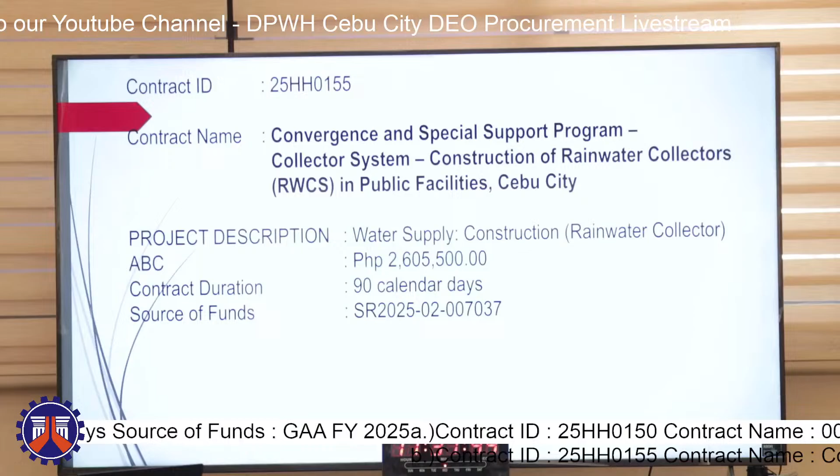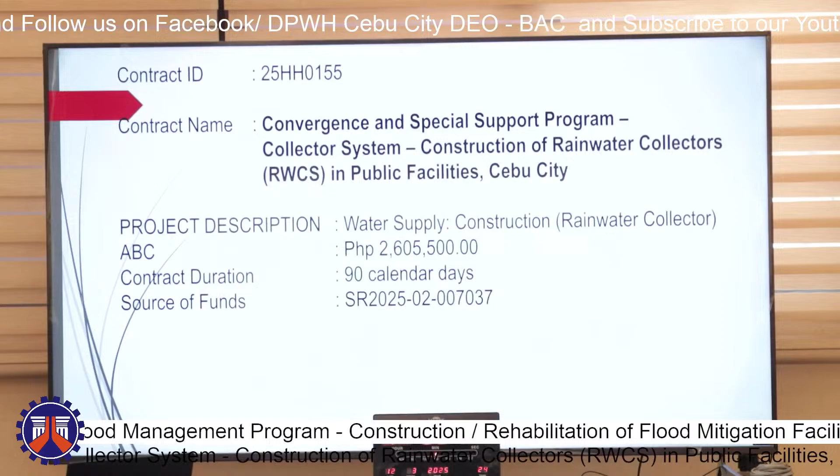Good morning, everyone. This is for contract ID 25HH0155, Convergence and Special Support Program, collector system, construction of rainwater collectors in public facilities in Cebu City. Project description is water supply construction and rainwater collector. Approved budget cost is 2,605,500, and contract duration is 90 calendar days. Source of fund SR 2025-02-007037.

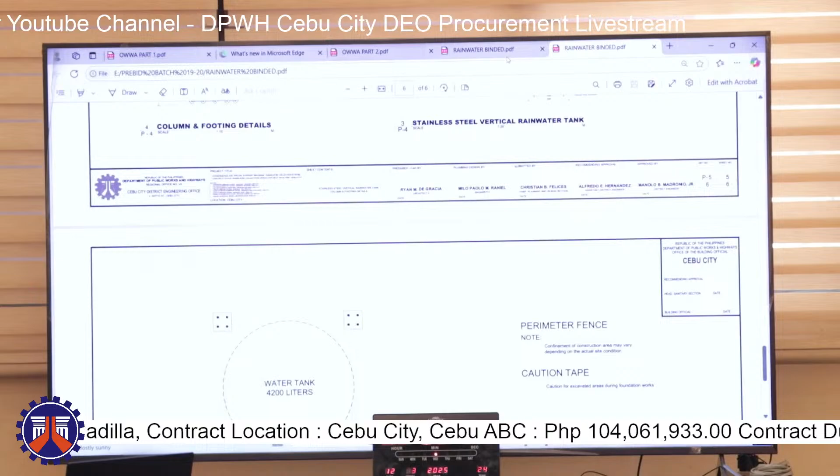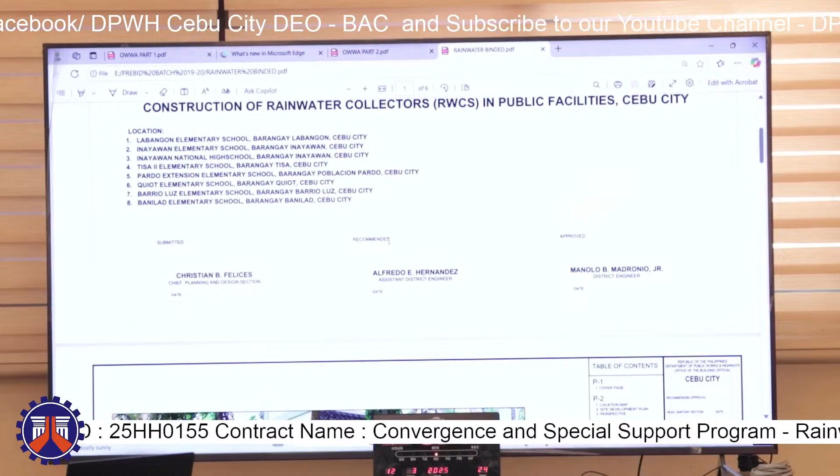This is the location of these various respective projects. We have 8 locations for this project. These are the typical plans: Labangon Elementary School, Inayawan Elementary School, Inayawan National High School, TISA 2 Elementary School, Pardo Extension Elementary School, Quiot Elementary School, Barrio Luz Elementary School, and Banilad Elementary School.

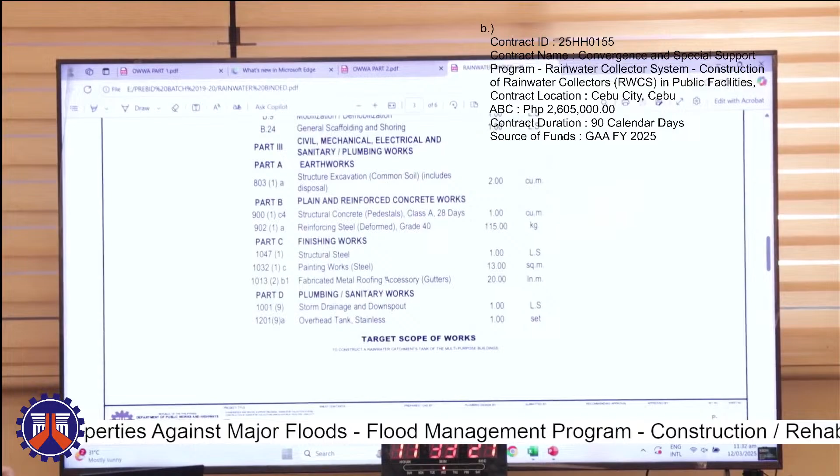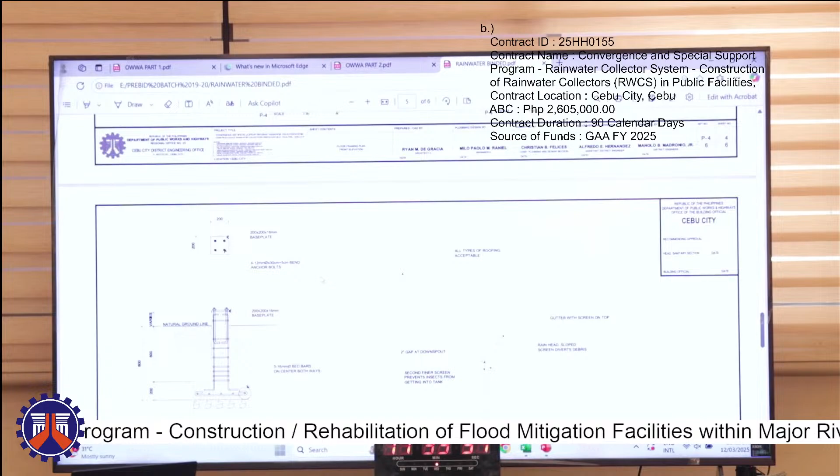These are the summary of quantities of the construction, earthworks, and also the finishes and plumbing. These are the typical plans of the respective projects, showing the details and connections from gutter to our tanks. That's all, thank you.

8 sites, 8 locations.

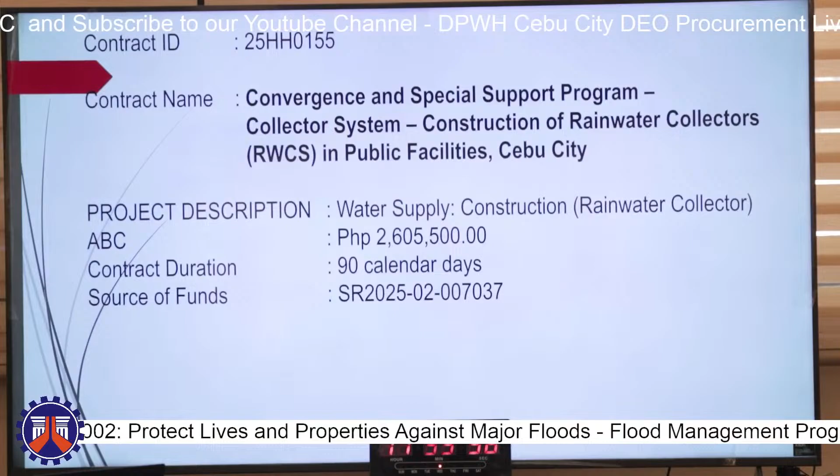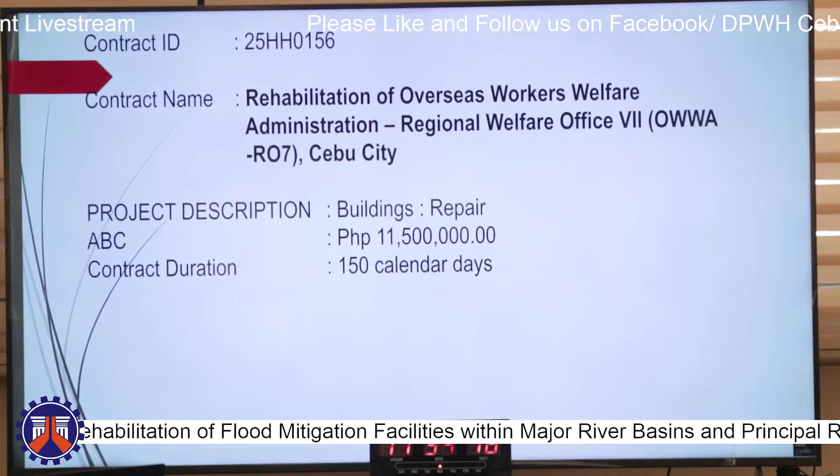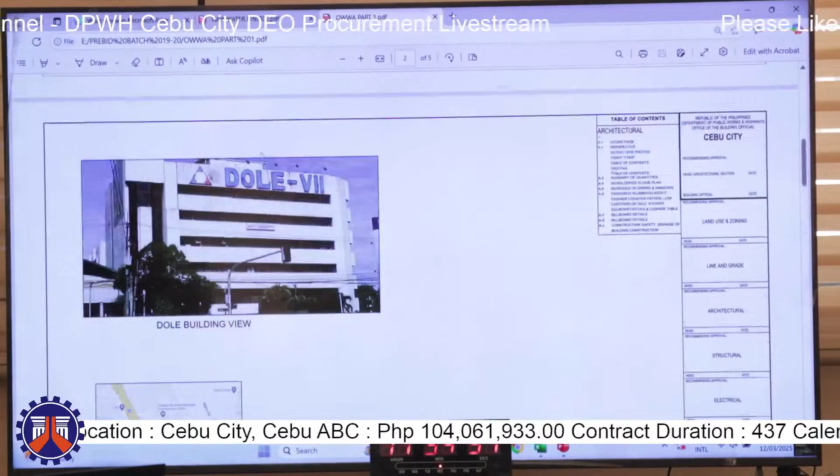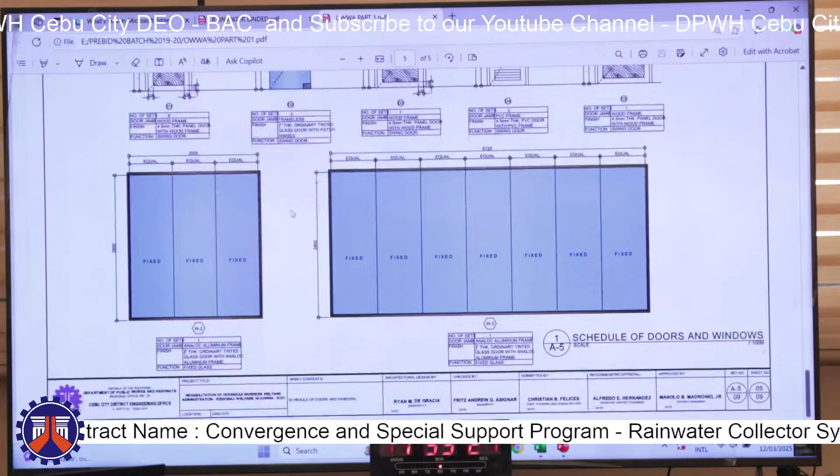Next ID number is 25HH0156, Rehabilitation of Overseas Workers Welfare Administration, Regional Welfare Office 7, OWWA RO7, Cebu City. Project description, buildings repair. Approved budget cost, 11,500,000. Contract duration, 150 calendar days. Located at DOLE 7 building, second floor, OWWA. Scope of work is mainly electrical, repair of walls, windows, then plumbing fixtures, partition, glass partition, doors, replacement of doors, but this project is really more on electrical works.

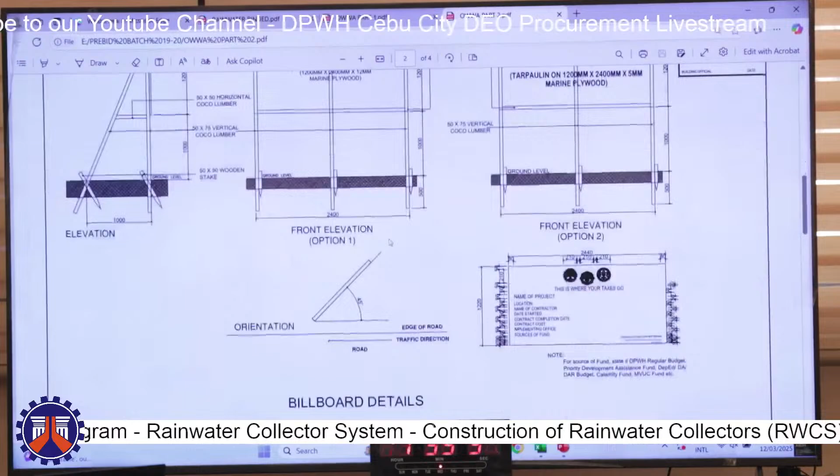That's all. 11,500,000, ma'am. Only the second floor, ma'am, OWWA office only.

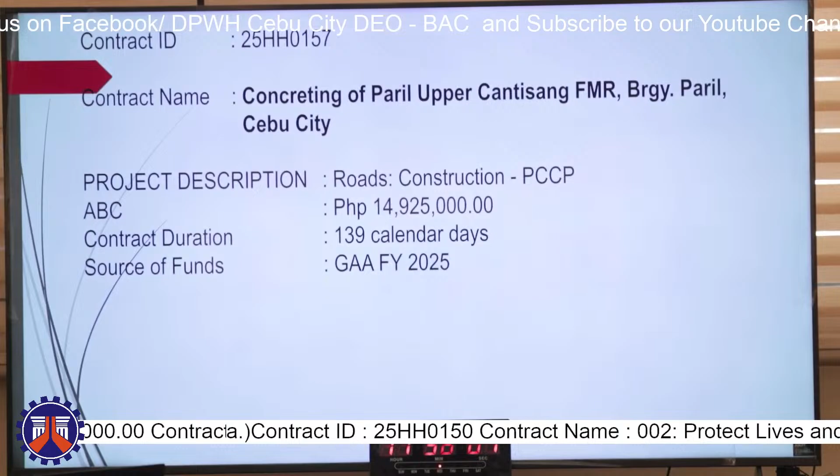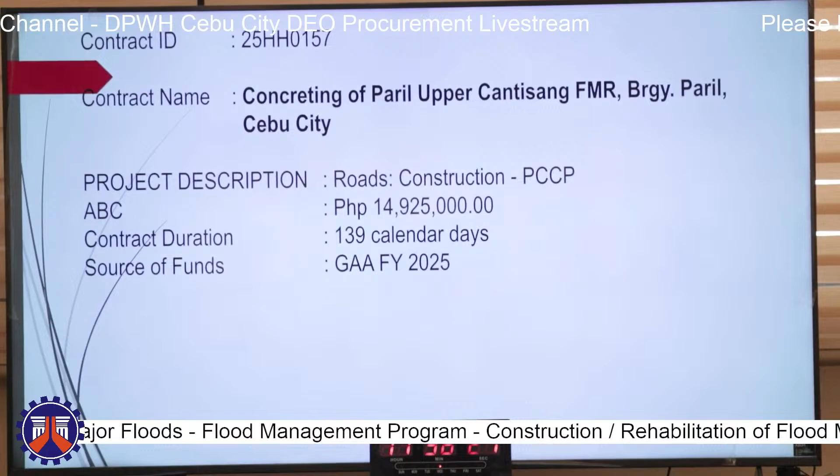Good morning, everyone. For the next contract ID 25HH0157, concreting of Paril Upper Cantisang FMR, Barangay Paril, Cebu City, with project description roads construction PCCP, with an ABC amount of 14,925,000 and a contract duration of 139 calendar days.

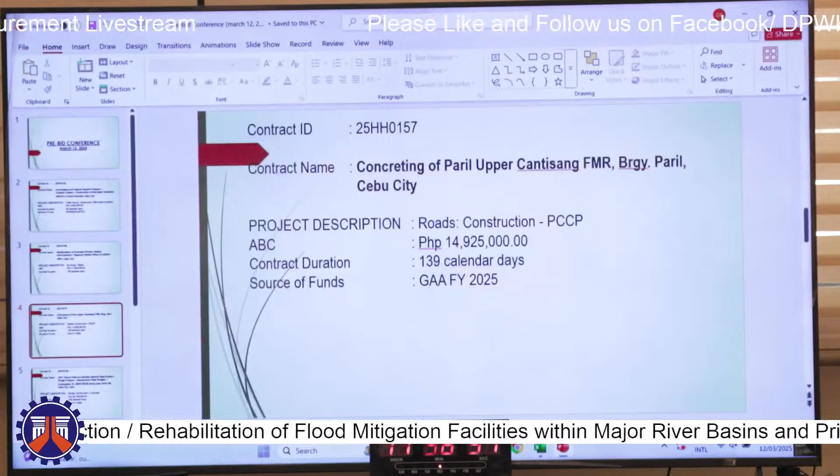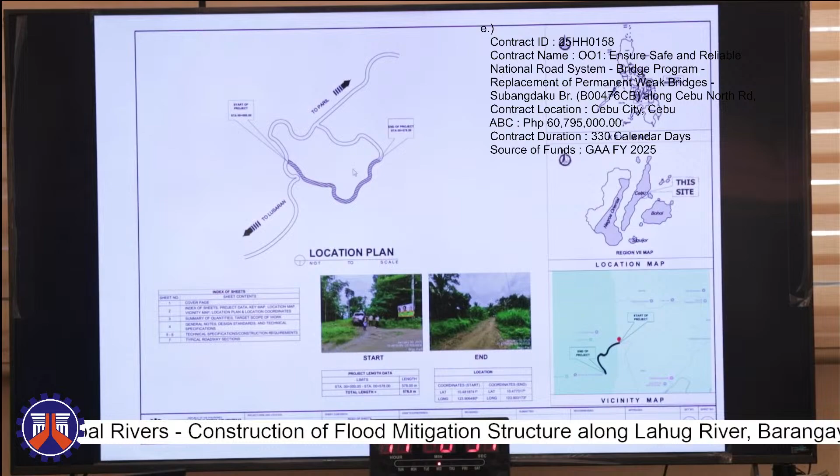The project has a net length of 578 meters. This is the location plan of the project, and at the bottom right shows the start and end of the project with corresponding coordinates to easily locate it.

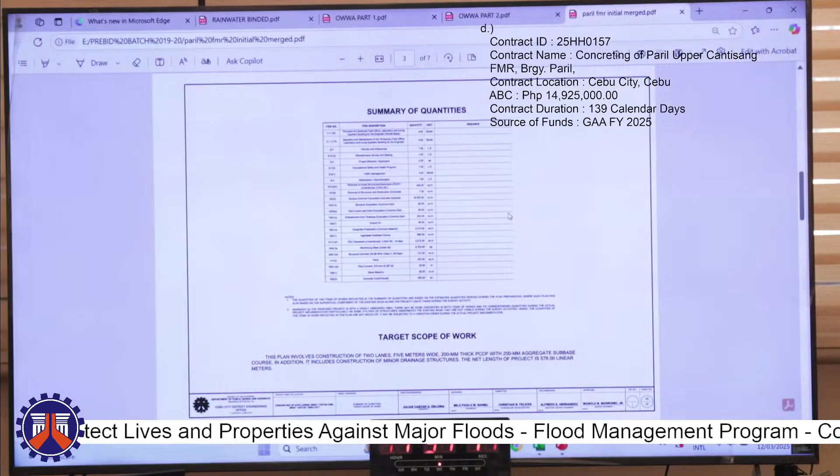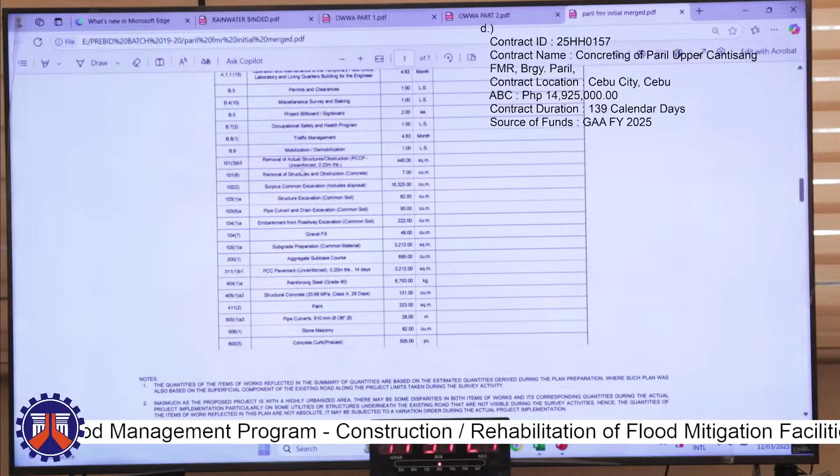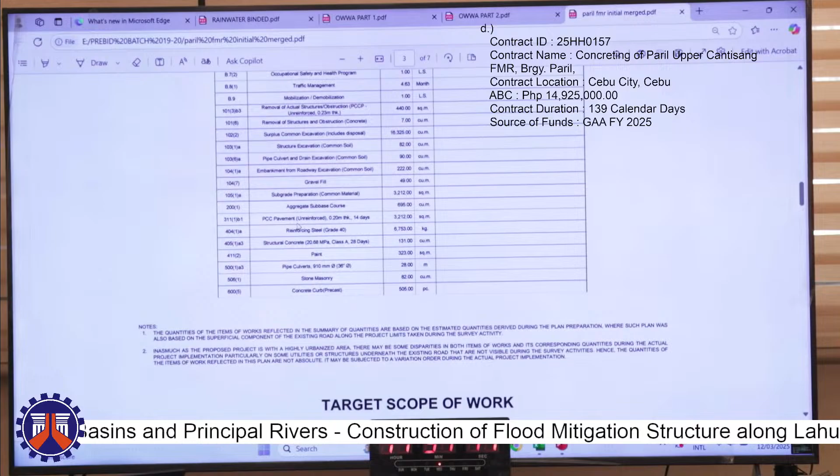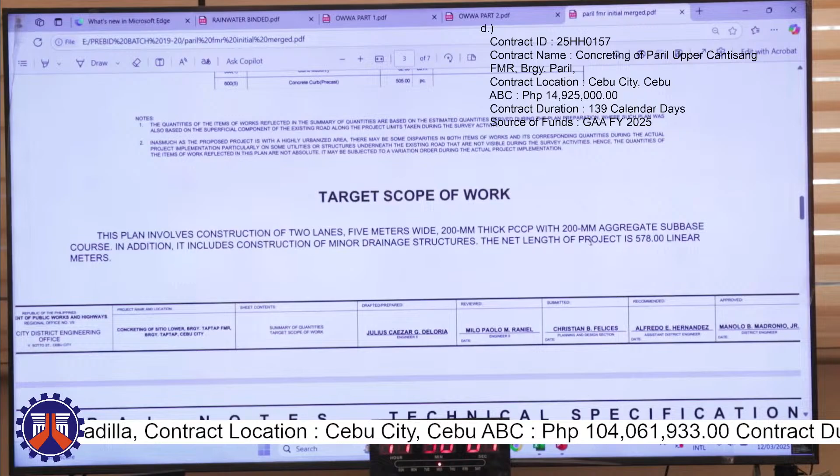For the scope of work, we have the usual items: removal of existing PCCP, removal of concrete, surplus common excavation, structure excavation, pipe culvert and drain excavation, embankment, gravel fill, subgrade preparation, aggregate subbase course, PCCP 0.2 thickness 14 days, reinforcing steel, structural concrete paint, pipe culvert, stone masonry, and precast concrete curb. The project involves construction of 2 lanes, 5 meters wide, using 200 mm thick PCCP with 200 mm aggregate subbase course, and also includes construction of minor drainage structures, with the net length again being 578 meters.

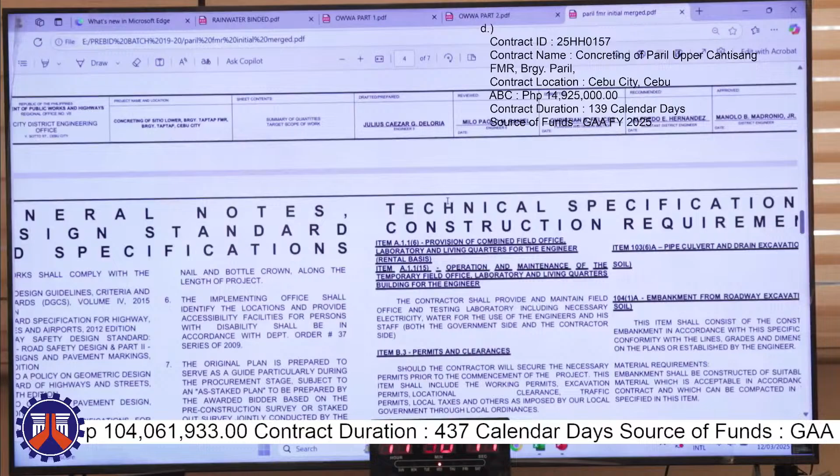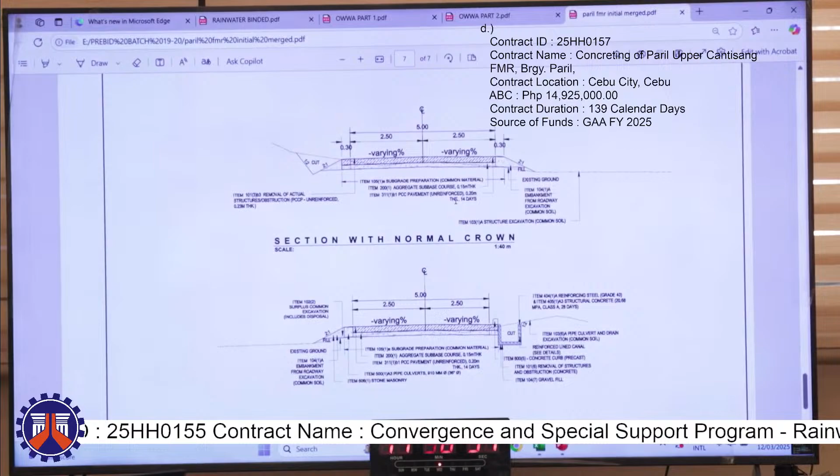The next page shows the technical specifications, and this is the typical section of the project. There will be portions with no lined canal, and there will also be certain portions with lined canal on the right side. That's all.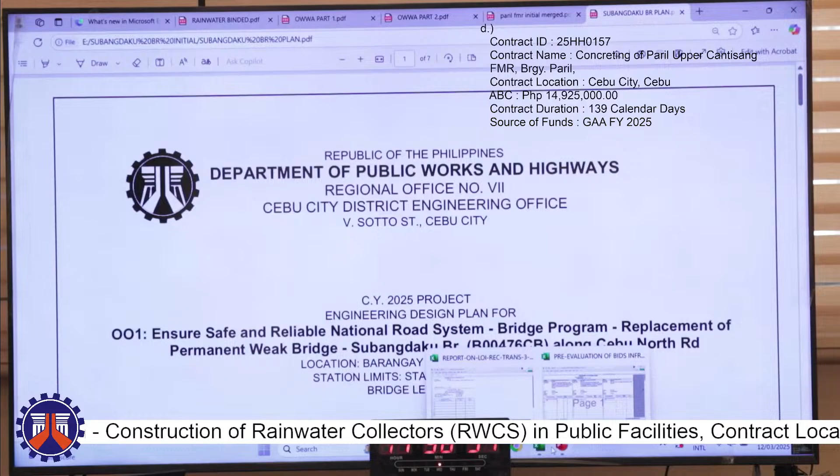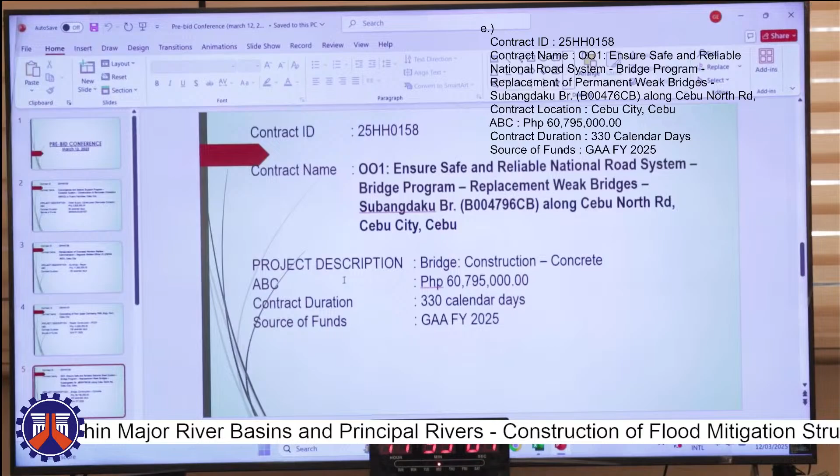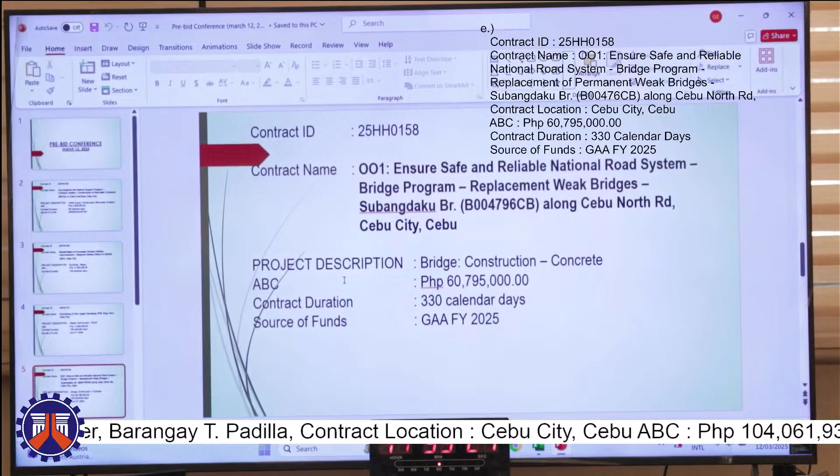Next is contract ID 25HH0158-001, Ensure Safe and Reliable National Road System, bridge program replacement of weak bridges, Subangdaku Bridge, B00476CB along Cebu North Road, Cebu City, Cebu. Project description, bridge construction concrete. ABC 60,795,000 pesos. Contract duration 330 calendar days. Source of funds GAA FY 2025.

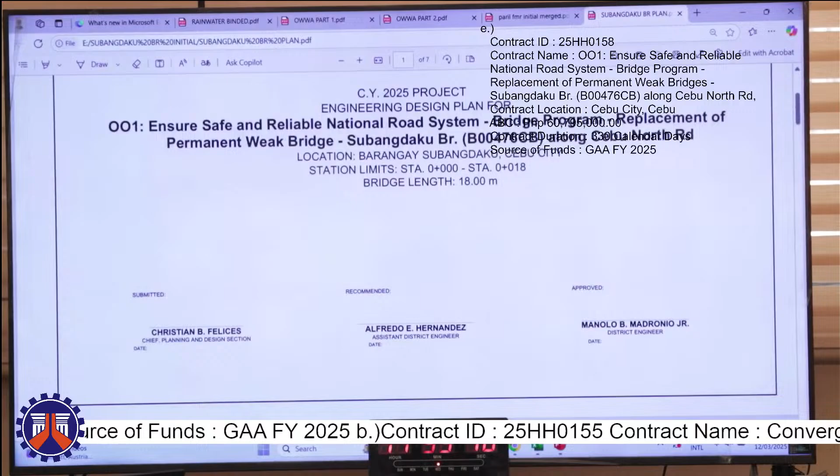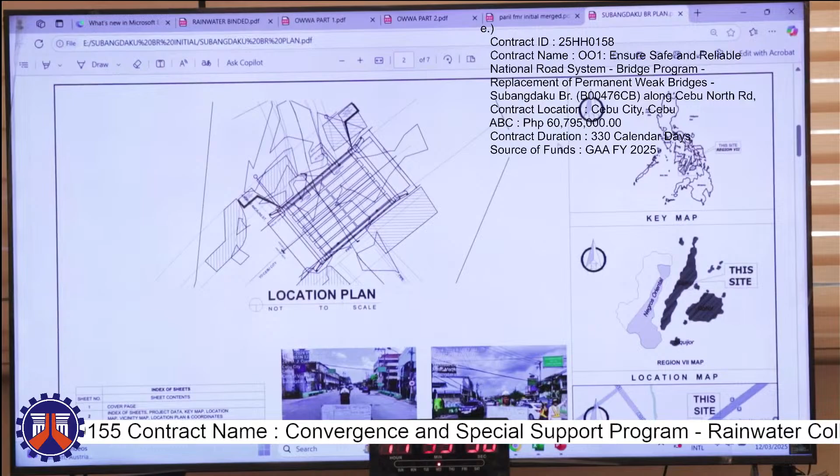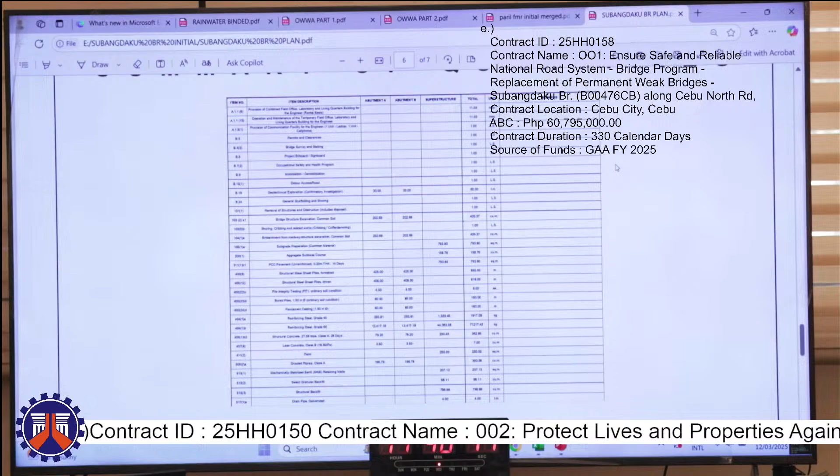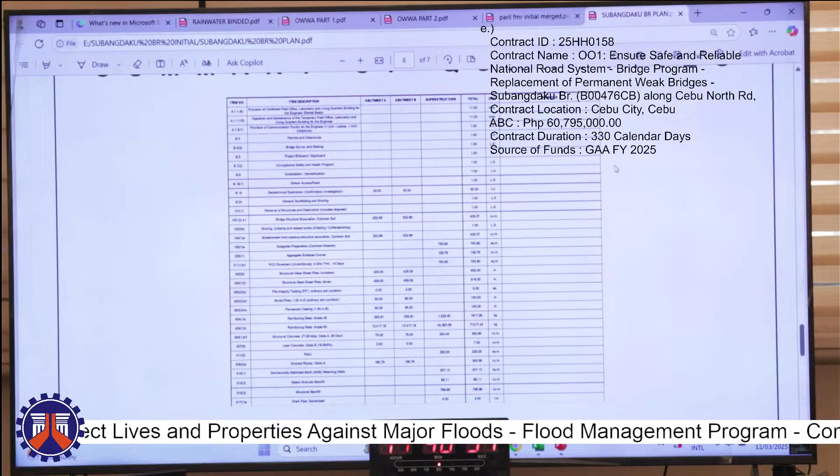Next is the general notes and technical specifications of the said items, followed by the summary of quantities. This includes provision of permits and clearances, staking, project billboard, occupational safety, mobilization, and then the major items: removal of the said bridge and shoring, subgrade preparation, aggregate sub-base course, and concrete pavement for the bridge approach, structural sheet pile, and we will use bored piles with permanent casing and mechanically stabilized earth retaining walls. That's all.

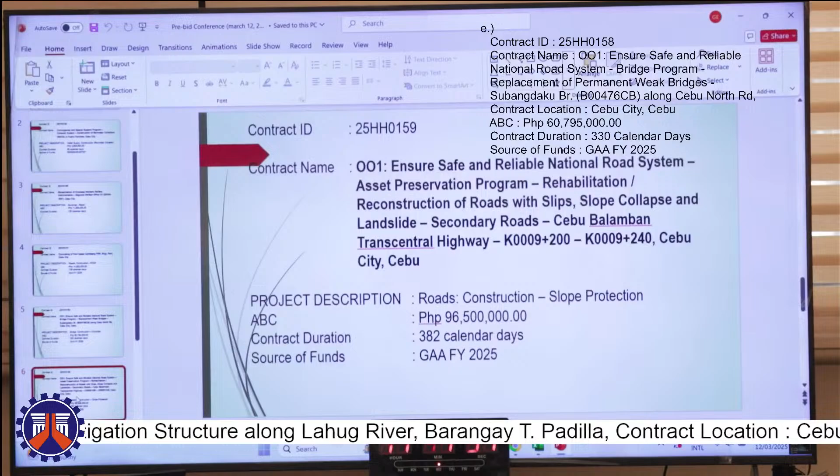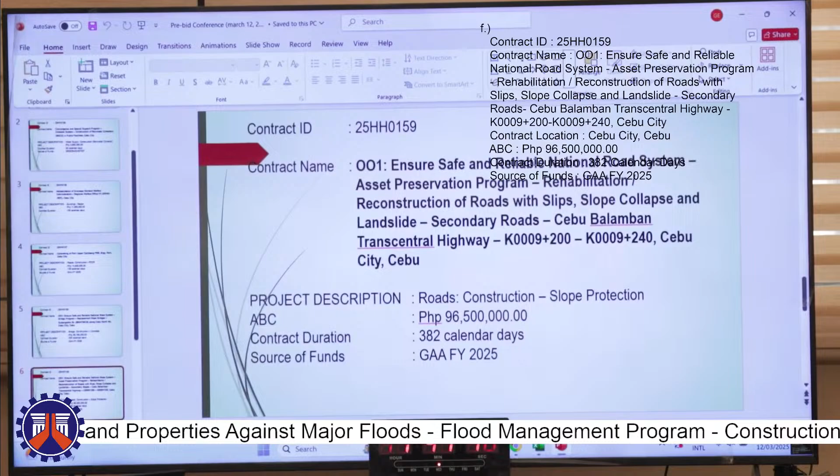So for the next project, with a contract ID of 25HH0159, contract name OO1, Ensure Safe and Reliable National Road System Asset Preservation Program, Rehabilitation, Reconstruction of Roads with Slips, Slope Collapse, and Landslide, Secondary Roads, Cebu Balamban Transcentral Highway, KM 9+200 to 9+240, Cebu City, Cebu.

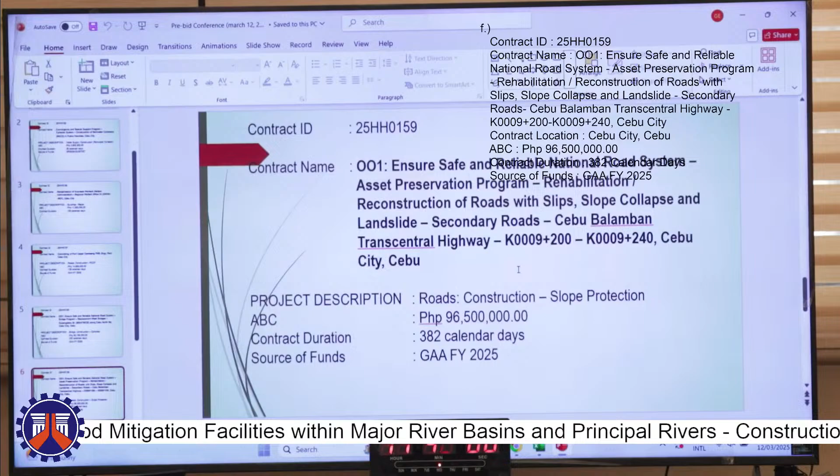Project description: roads construction, slope protection. Approved budget of contract is 96,500,000 pesos, with a contract duration of 382 calendar days. Source of funds is GAA FY 2025.

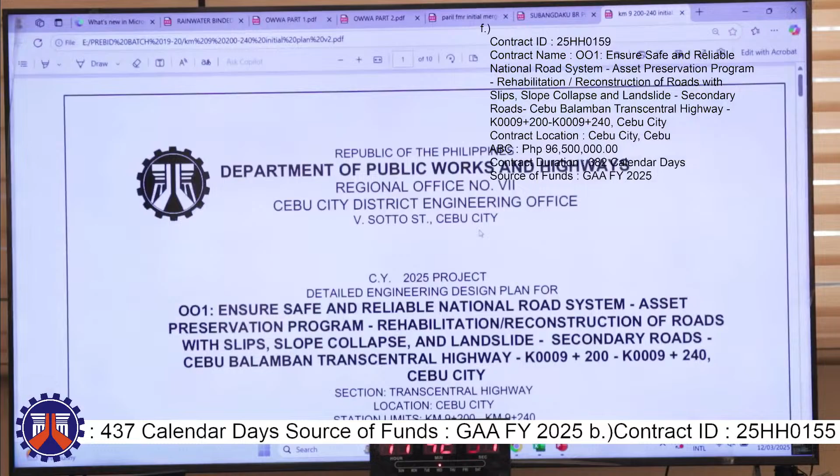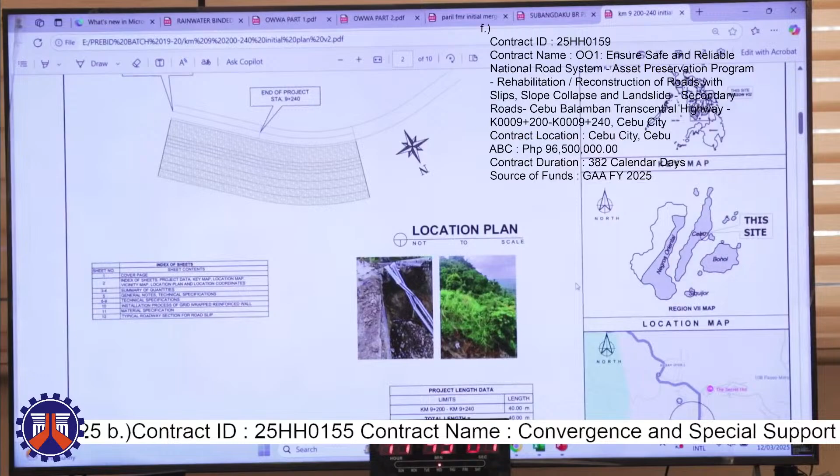So this project has a total net length of 40 meters. And this is the location of the project, located in KM9 T. Padilla. Then this is the summary of quantities of the project.

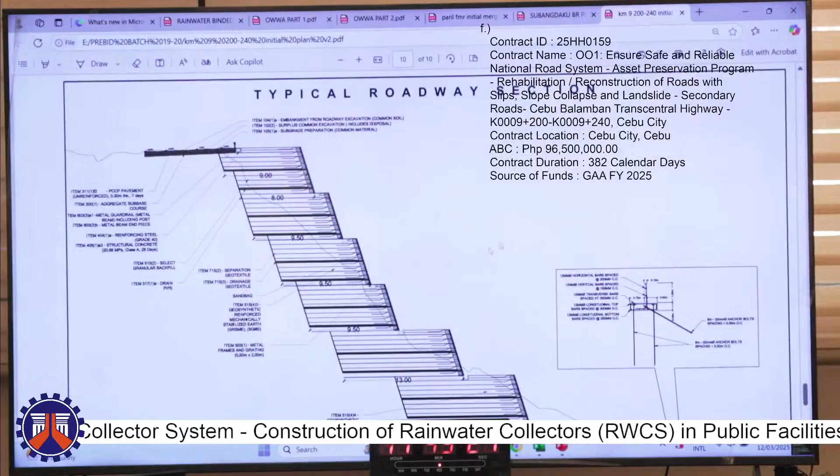To visualize its summary of quantities, we will proceed to the roadway section. So this is the roadway section of the project. We have item 104, embankment. We have 102, surplus common excavation. We also have 105 for the subgrade preparation, item 311F2 PCCP 0.3 meter thick, 7 days, and item 200, aggregate sub-base course. Those items are for the PCCP of the project.

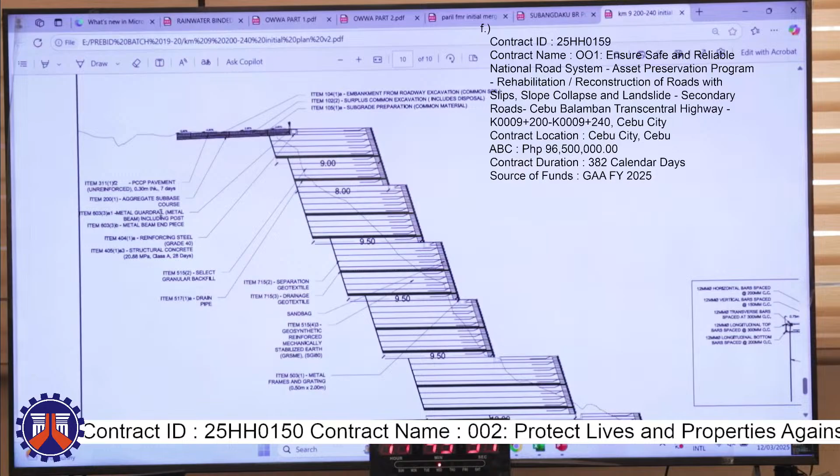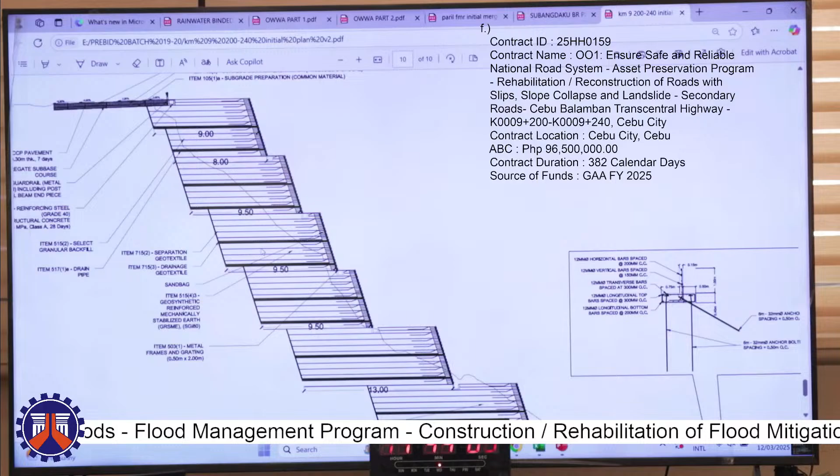Next, we also have item 603A1 and item 603-3B for the metal guardrail. Next, we have item 404, reinforcing steel, and item 405-1A2, structural concrete for the drainage structures. Then, for the road slip, we have item 5152, select granular backfill, 517A for the drain pipe, 7152 for the separation geotextile, 7153, drainage geotextile, sandbag, and item 51543, geosynthetic reinforced mechanically stabilized earth.

We also have permanent ground anchor. I think that's all for this project.

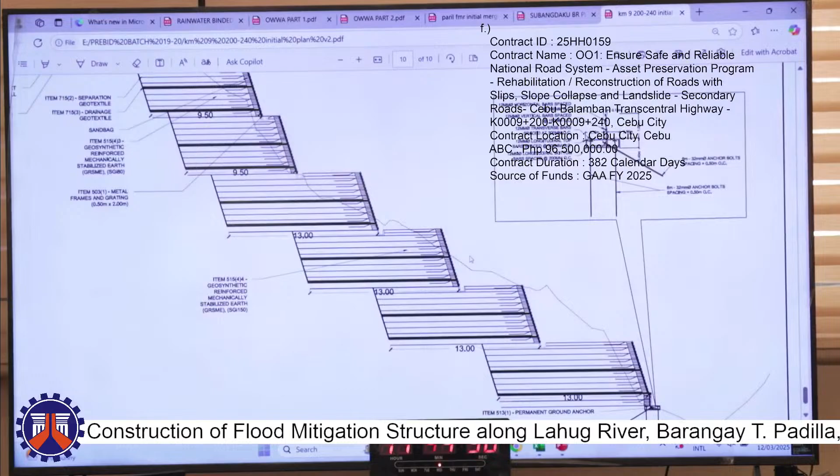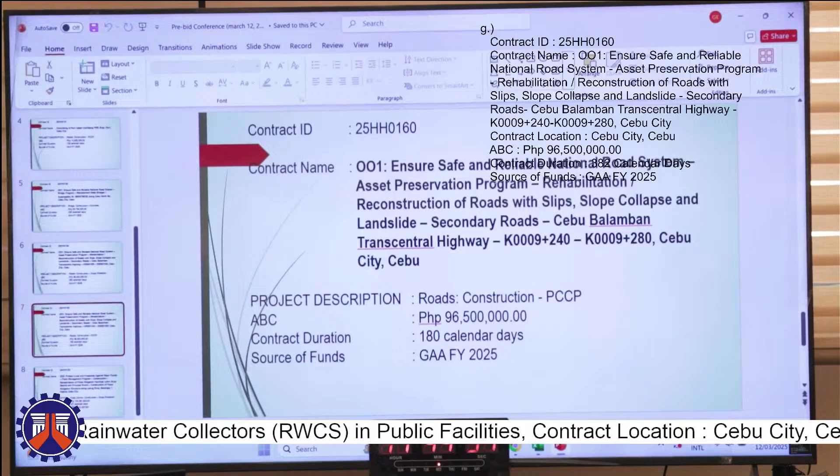Next is with a contract ID of 25HH0160, 001, ensure safe and reliable national road system asset preservation program, rehabilitation, reconstruction of roads with slips, slope, collapse, and landslide. Secondary roads, Cebu Balamban Transcentral Highway, kilometer 9,240 to kilometer 9,280, Cebu City, Cebu.

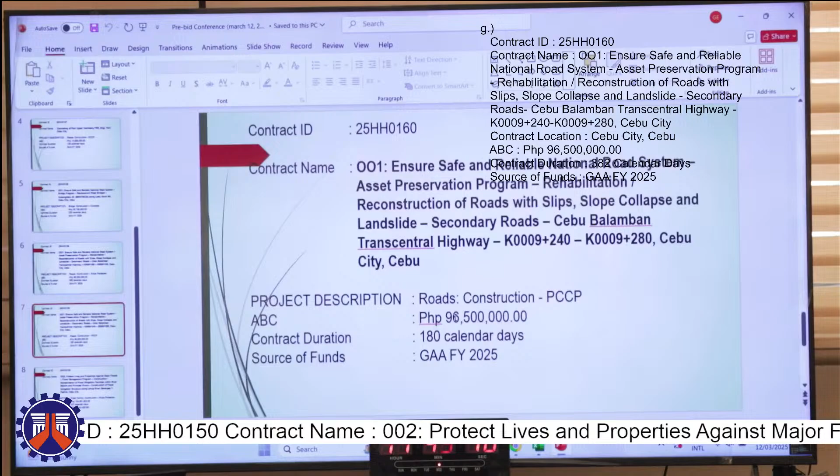Project description of roads construction, PCCP. Approved budget of contract 96,500,000 with a contract duration of 180 calendar days. Source of funds, GAA FY 2025.

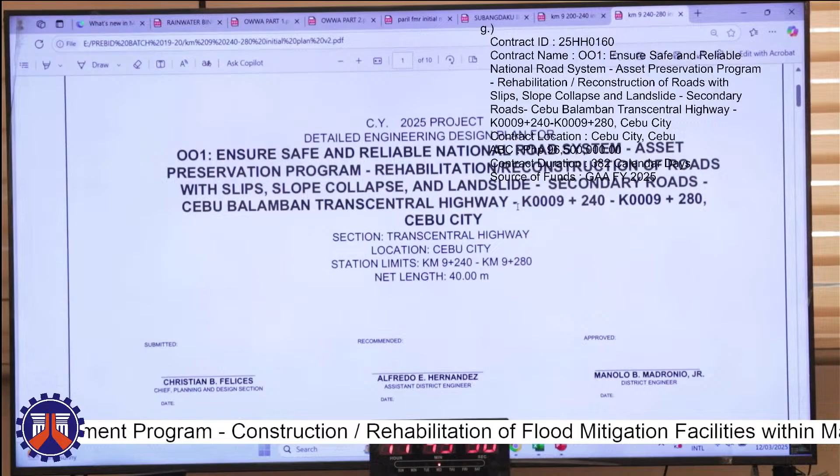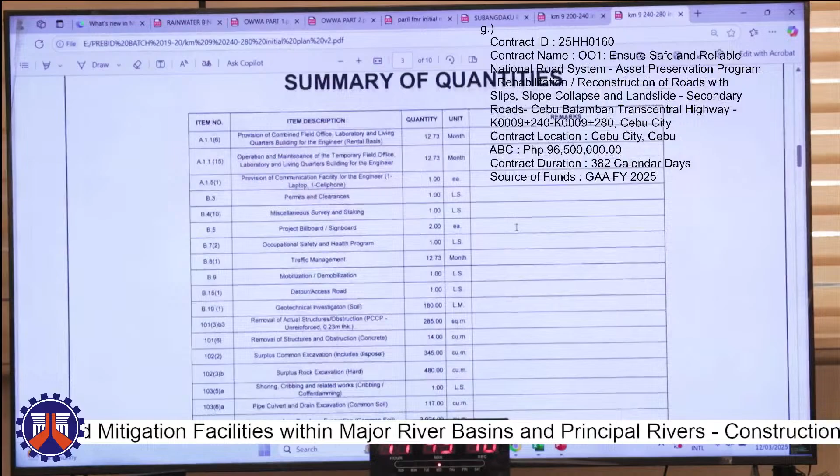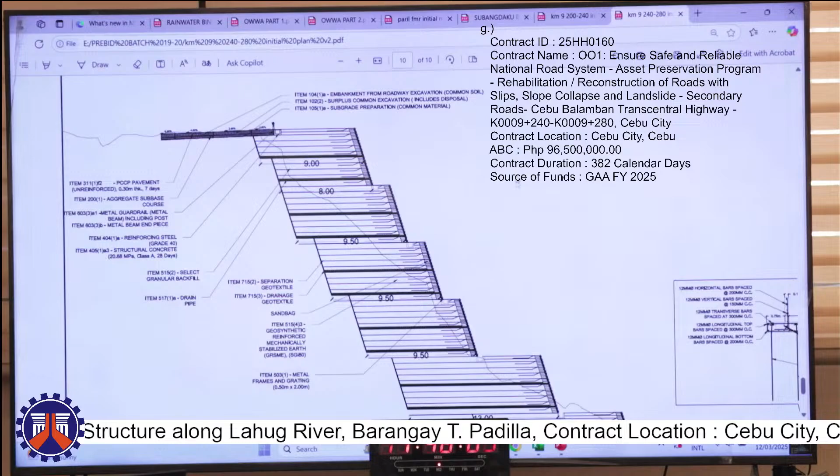Then for the roadway section, we have 104 1A embankment, 102 surplus common excavation, 105 1A for the subgrade preparation, 311 F2 PCCP 0.30 meters thick, 7 days, item 200 aggregate sub-base course. That's all for the PCCP.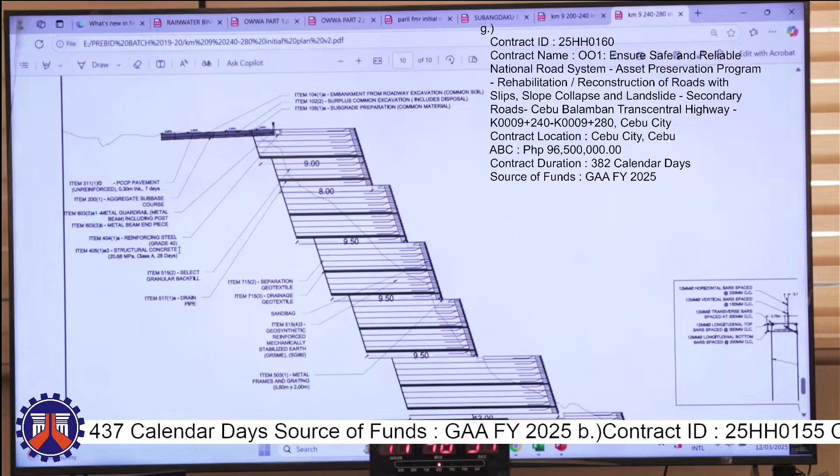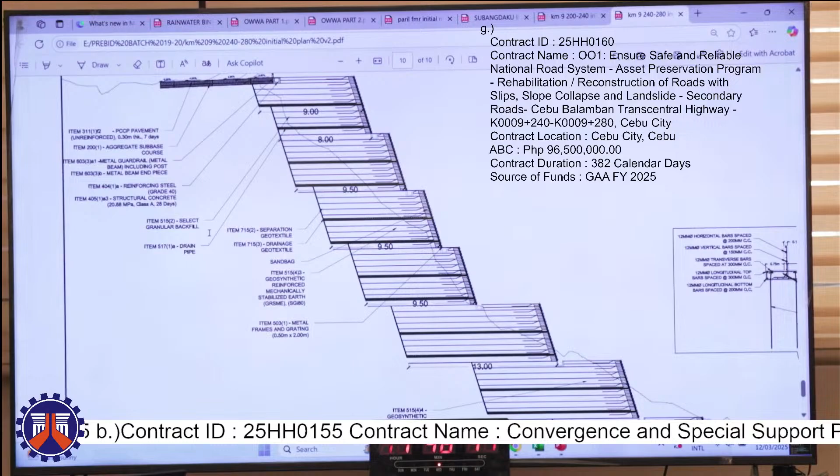Then we have 603 3A1 metal guardrail, 603 3B metal beam end piece. And for the drainage, we have item 404 1A and item 405 1A3, reinforcing steel and structural concrete. Then for the road slip, we have select granular backfill, drain pipe, separation geotextile, drainage geotextile, sandbag, geosynthetic reinforced mechanically stabilized earth, then permanent ground anchor. That's all for this project.

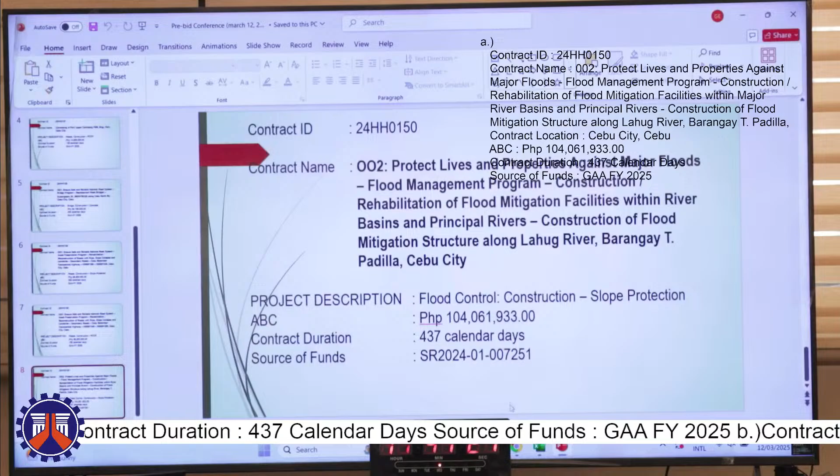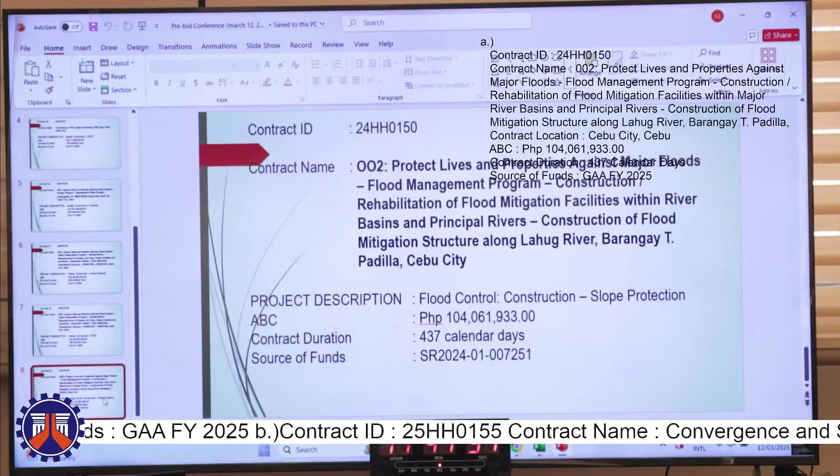So for the contract ID 24HH0150, contract name 002, protect lives and properties against major floods, flood management program, construction rehabilitation of flood mitigation facilities within river basins and principal rivers, construction of flood mitigation structure along Lahug River, Barangay Padilla, Cebu.

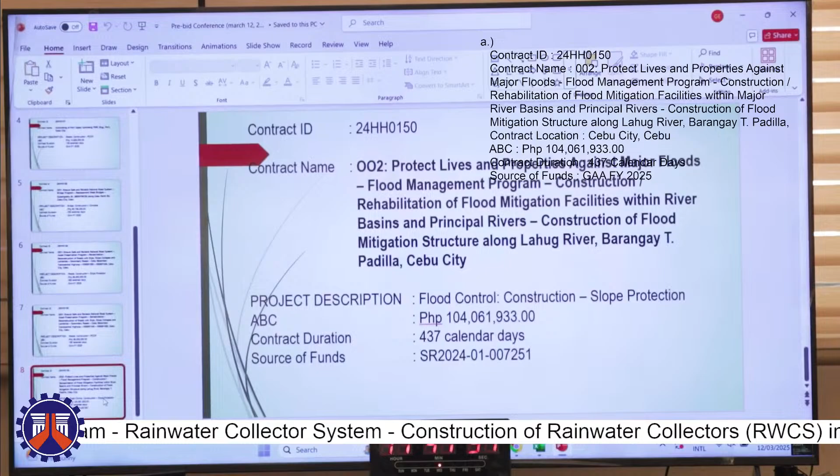Project description: flood control, construction, slope protection, with an ABC amount of 104,061,933 pesos. Contract duration, 437 calendar days. Source of funds, SR 2024-01-007251.

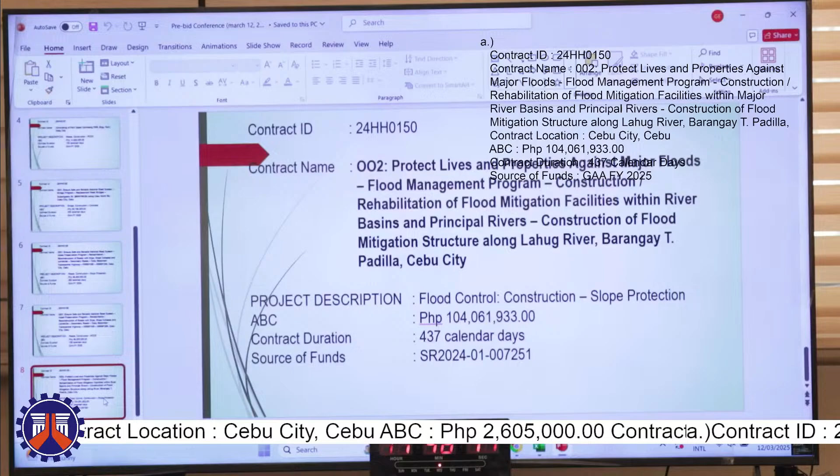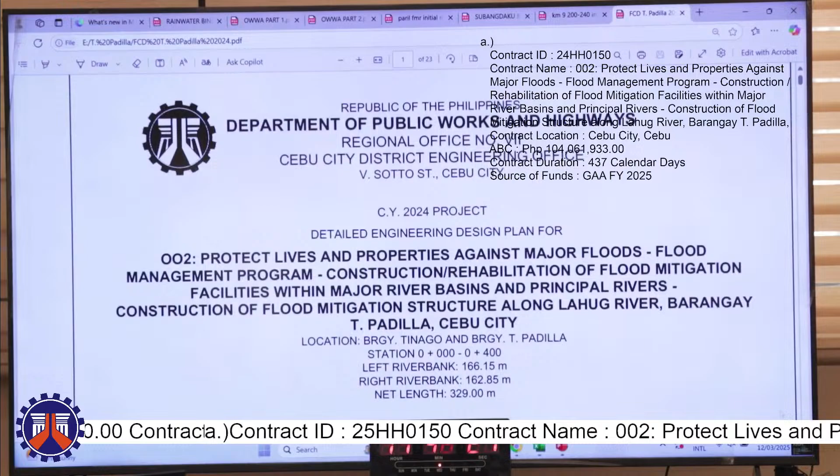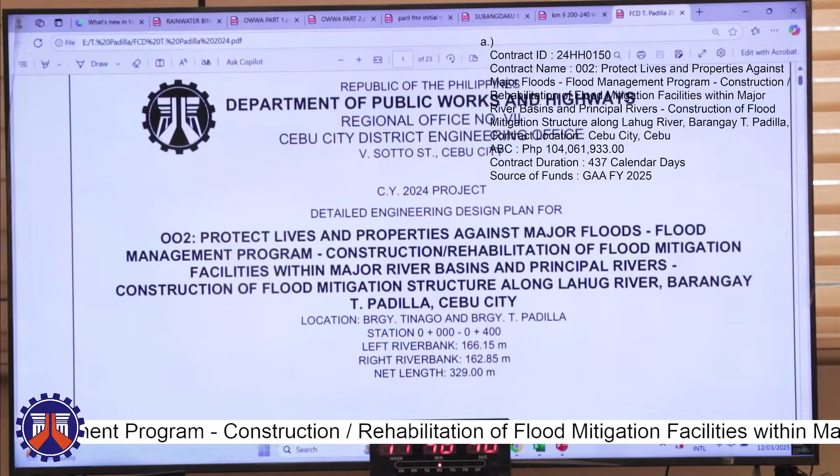So this project is the continuation of our previous projects along Lahug River, mainly at Barangay Padilla. Station limits is 0 to station 400 with a left river bank length of 166.15 and a right river bank length of 162.85 meters, with a total length of 329 meters. So geotag pictures are also provided in the plan. Location plan.

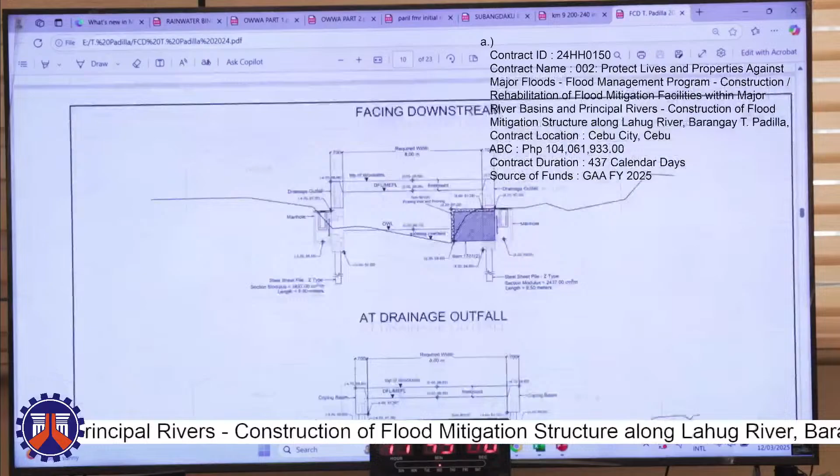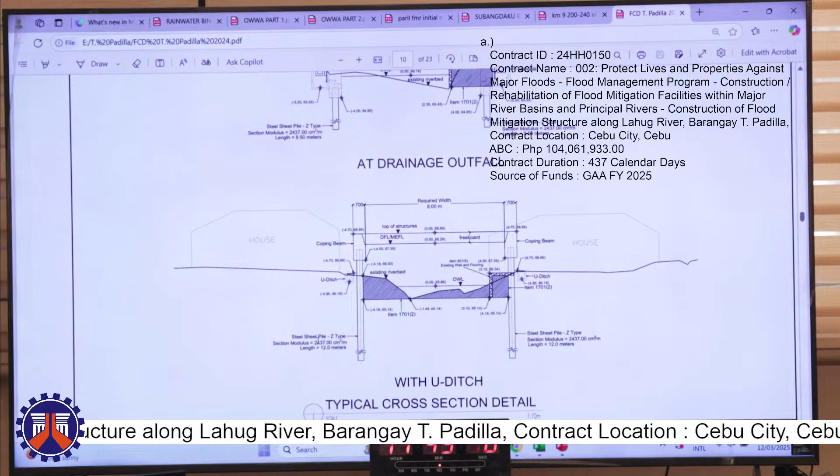And for the scope of work of this project, we have construction of coping beam, structural concrete. We also have steel sheet pile Z type with a length of 12 meters each side. We also have removal of existing structure, channel excavation. We also have construction of U-ditch and a manhole.

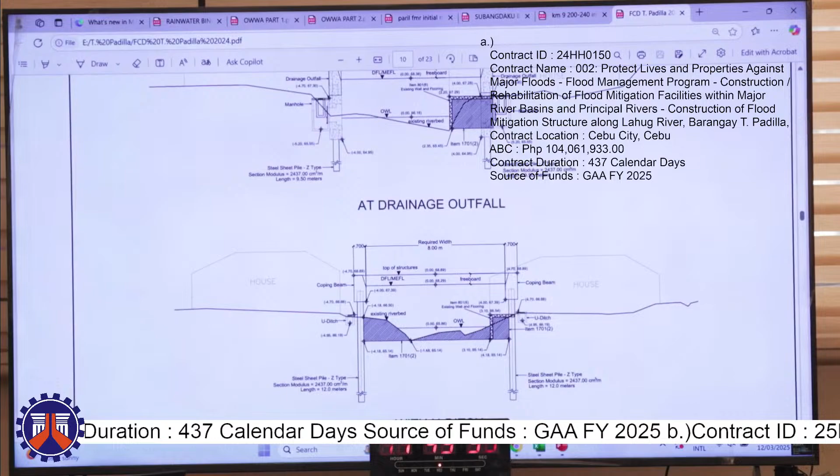So this project has a road right-of-way amount of 11,562,437. So this will be the payment of the affected structures along the project limits. So that's all for this project.

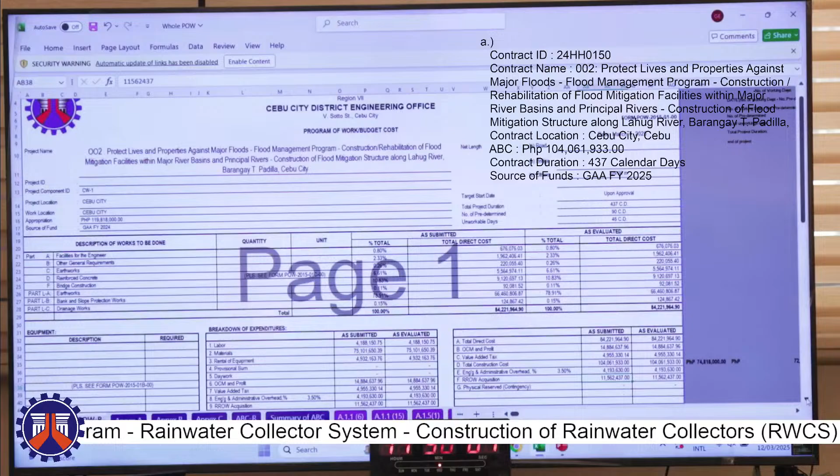Okay, so I think that's all for the discussion of the 7 projects. Any concerns from our visitors?